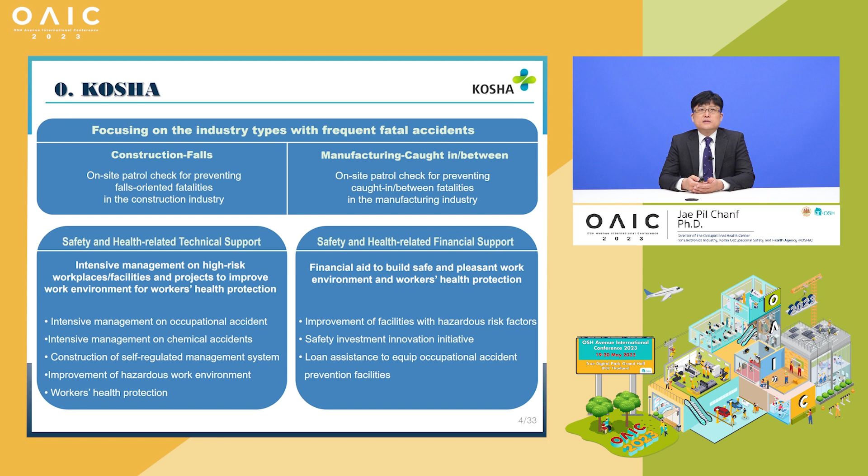Before I move on to the main discussion, I'd like to briefly introduce KOSHA. KOSHA means Korea Occupational Safety and Health Agency. It was established in 1987 and is composed of headquarters, 4 institutes, and several area offices. We especially focus on industry types with frequent fatal accidents, carrying out patrol inspections to prevent falls in construction and caught-in or caught-between injuries at manufacturing sites.

Now, let me begin with the background. The Safety and Health at the Heart of the Future of Work report, published in 2019 by ILO, discusses technology, demographics, sustainable development, and changes in work organization. These changes are seen as the future challenges and opportunities of OSH.

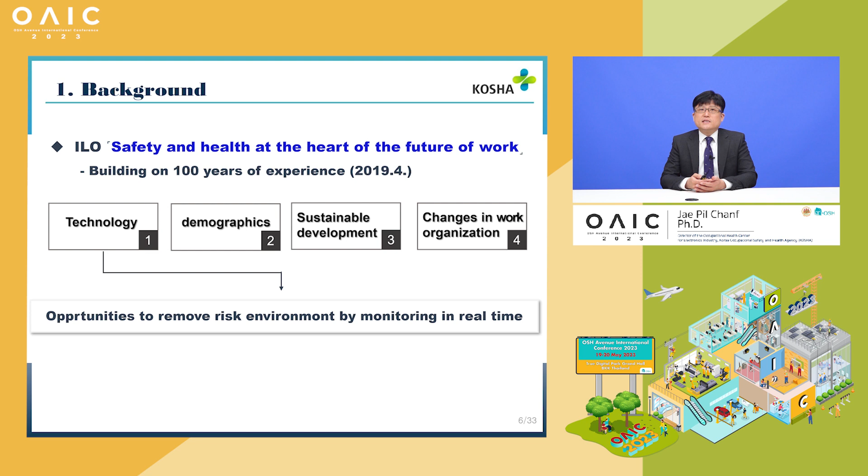The report says digitalization and ICT technology development can provide opportunities to remove risk environments by monitoring exposure to risk in real time. Therefore, a paradigm shift is necessary to protect workers' health by using ICT technology.

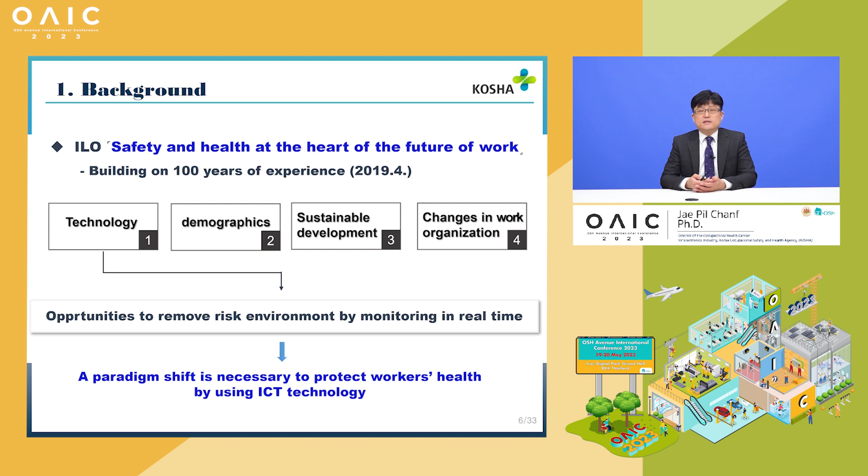Though Industry 4.0 technology keeps developing, it is not being applied to or used in systems for industrial accident prevention in Korea. While these technologies are being actively used in other areas of safety, such as firefighting safety and public security, OSH is applied with just conventional technical guidance and facility and equipment improvement.

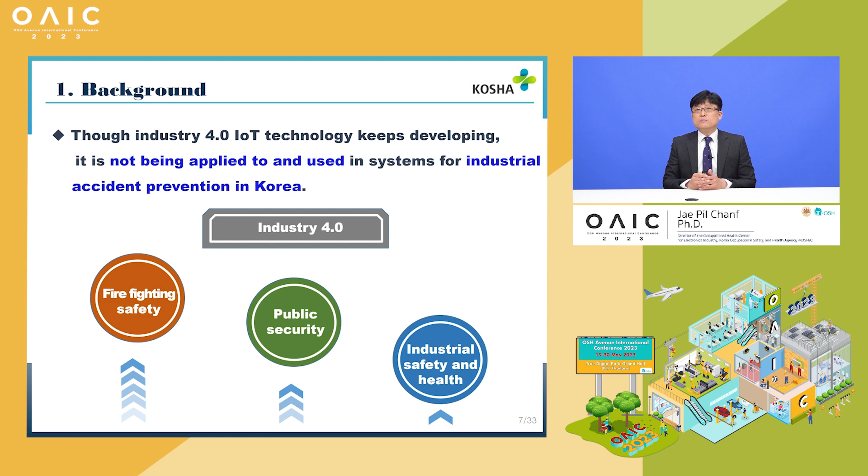As a result, cases of acute chemical poisoning are increasing in Korea. Most cases have occurred during non-routine work, temporary or short-time cleaning work. For example, there was a death caused by acute poisoning with dichloromethane last year, and a person died while cleaning inside a TCE washing tank in 2019.

Although Korea has devised a work environment measurement framework and provided technical guidance to prevent such acute poisoning accidents, these measures are not enough to prevent accidents caused by non-routine work. That is because the work environment is measured semi-annually, and the technical guidance is given just as a one-time visit for technical support. In addition, business owners have a complacent mindset that there is no problem as long as they comply with the basic law, and this results in a lack of motivation to improve the work environment.

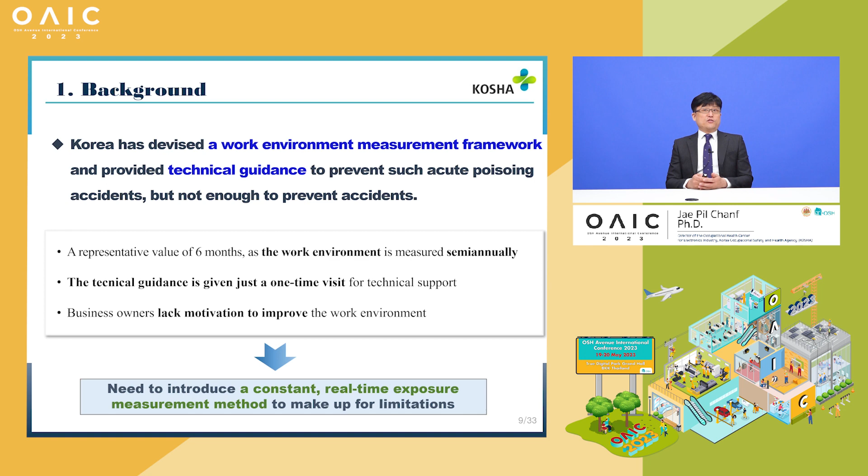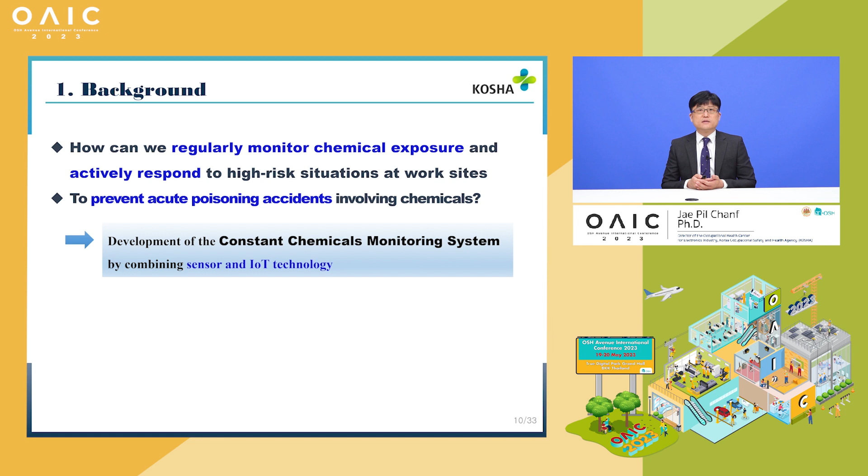So, I need to introduce a constant real-time exposure measurement method to make up for these limitations. How can you regularly monitor chemical exposure and actively respond to high-risk situations at work sites to prevent acute poisoning accidents involving chemicals? To make up for such limitations, we have developed the constant chemicals monitoring system with a combination of sensor and IoT technology.

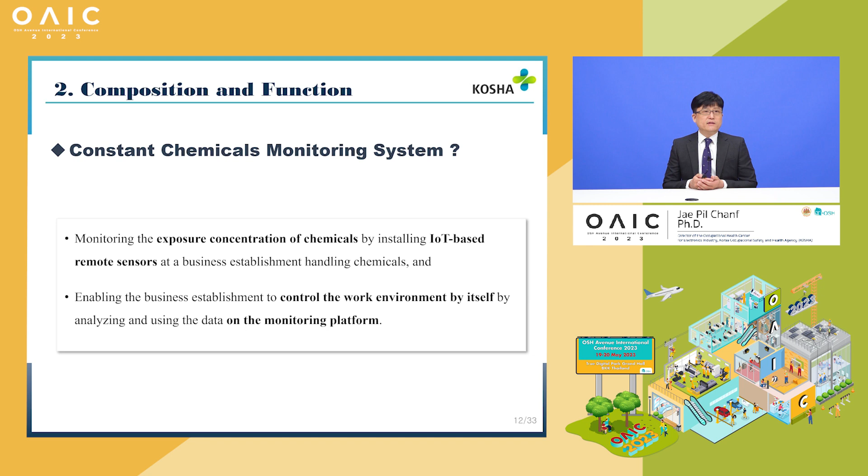The constant chemicals monitoring system is developed to regularly monitor the exposure concentration of chemicals by installing an IoT-based remote sensor at the business establishment that handles chemicals, enabling businesses to control the work environment by themselves by analyzing and using the data on the monitoring platform.

Step 1: With the sensors installed at the business sites, the measured data is transmitted to a monitoring platform where workers or managers can check the exposure concentration of chemicals in real time.

Step 2: When the exposure goes above a certain level, an alarm is triggered in the sensor and an SMS notification is sent to registered mobile phones.

Step 3: With this system, businesses can check the performance of ventilators and improve the work environment to prevent occupational disease. Also, if a business submits an application to KOSHA, we provide support with consulting services and funds for work environment improvement.

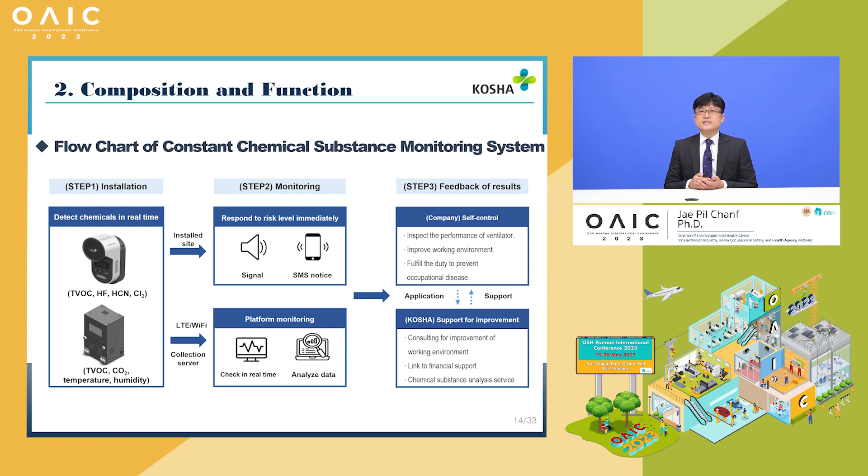The remote sensors were developed in 2020 to measure TVOC, hydrogen fluoride, hydrogen cyanide, and chlorine gas respectively. In other words, you can use a sensor with a TVOC detector if you want to measure TVOC.

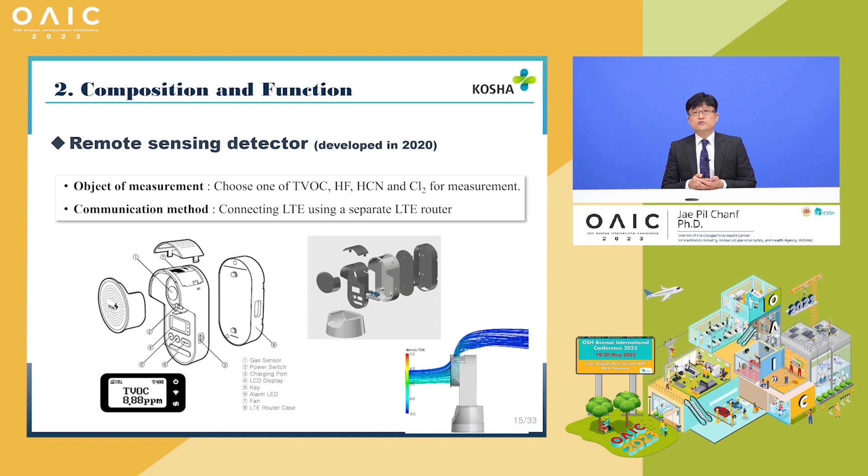A separate LTE router is attached to the sensor for communication. The remote sensor developed in 2021 supplemented what fell short in the 2020 version. The new sensors are modular and can be attached to and detached from the device.

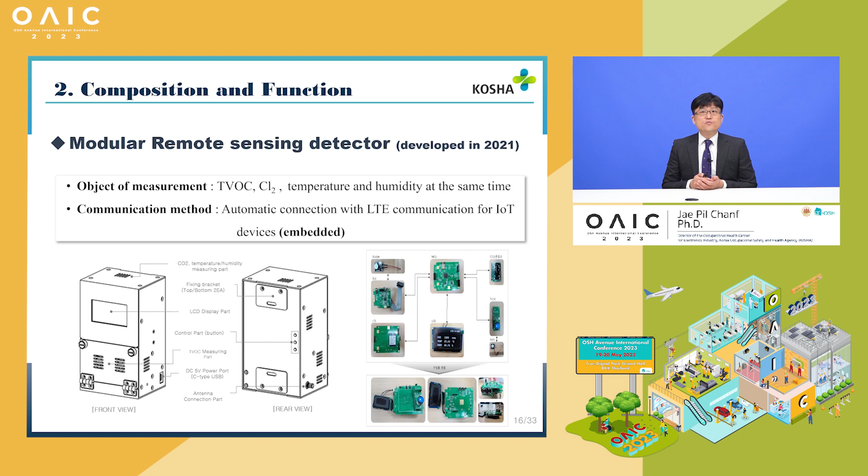This allows TVOC, carbon dioxide, temperature, and humidity to be measured at the same time. Communication parts were also upgraded with an LTE router embedded for automatic connection.

A PID sensor is used for the device as it was the most appropriate for detecting TVOC according to our research. The PID sensor uses the principle that UV rays generated in the UV lamp detect a material with an ionization tendency if it is below a certain electron volt.

Its measuring range is 0 to 6,000 ppm and its response time is 3 seconds. The picture on the left is a PID sensor.

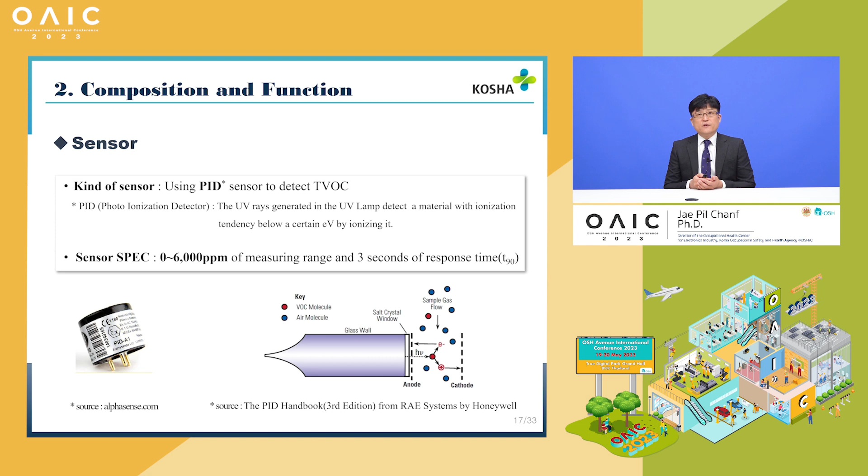The concentration value of certain chemicals can be estimated by multiplying its response factor (RF), provided by the sensor manufacturer, by the TVOC value detected by the PID sensor. For instance, when calculating the exposure concentration of TCE, if the TVOC value detected by the sensor is 10 ppm, it is multiplied by 0.6, the TCE's RF, to estimate the TCE's exposure concentration to be 6 ppm.

Sensor manufacturers provide the RF of each chemical, as seen in the table below. There are about 700 RF values for 10.6 electron volt sensors.

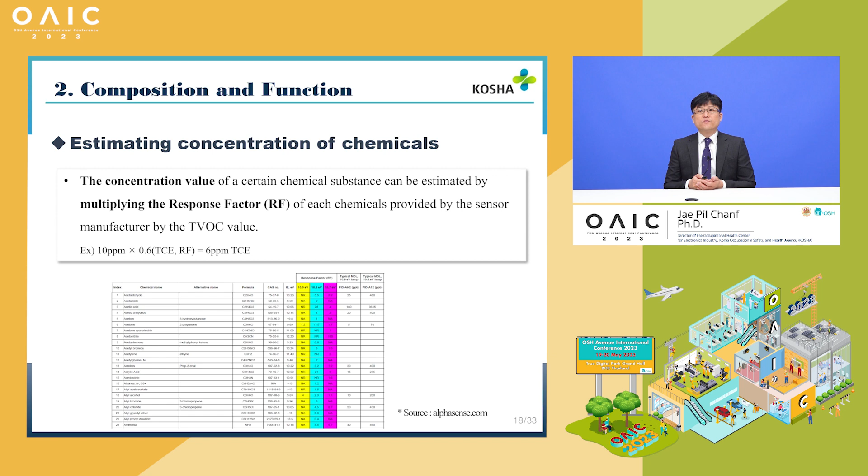The standard for the alerting signal was set on the basis of the ceiling value provided by ACGIH. If a chemical doesn't have a ceiling value, it is set on the basis of 5 times the TWA value. When an alert is triggered, immediate response such as ventilating or wearing PPE can be made on the ground.

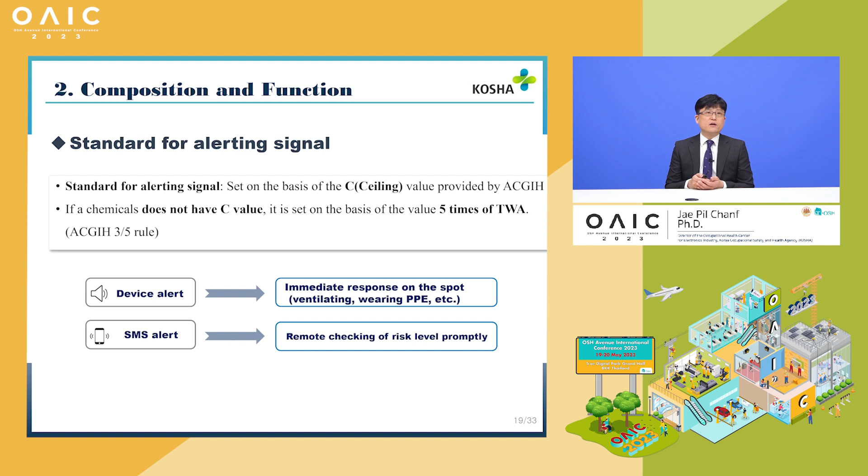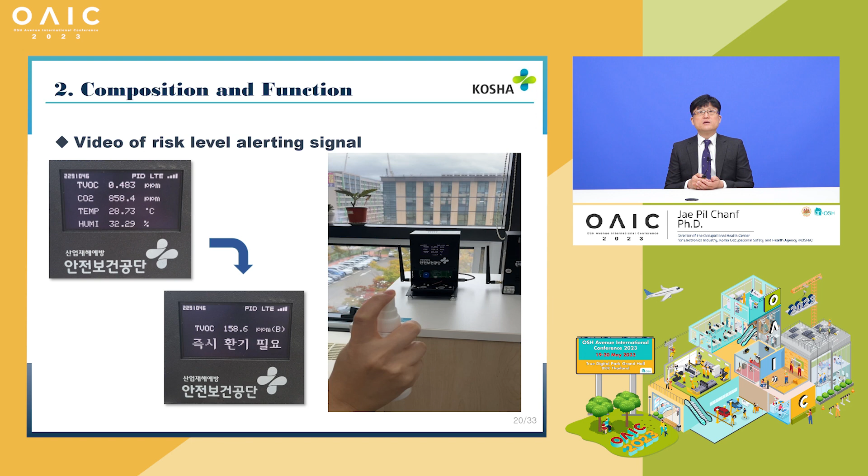Users who receive an SMS notification can promptly check the risk level in a remote environment. This video shows how an alert is triggered when the chemicals in the atmosphere are above a certain level. When the alarm rings, an immediate ventilation necessary message pops up on the LCD screen. Let's watch the video.

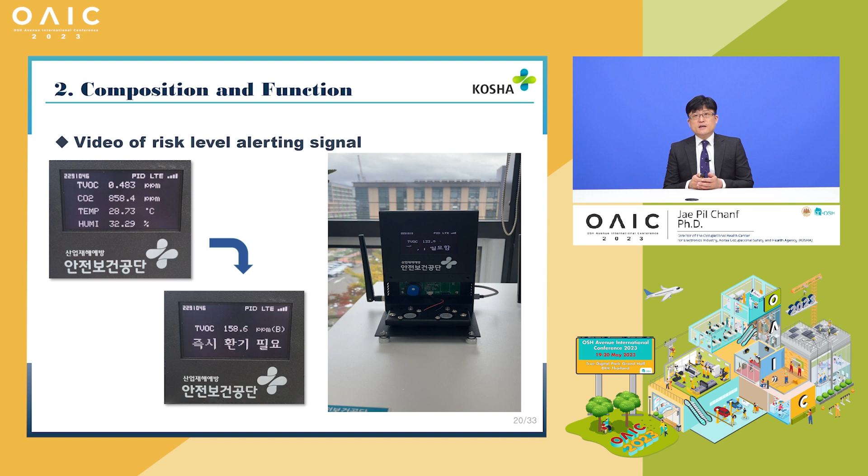For your information, the chemical spray in the video is hand sanitizer.

The exposure concentration of chemicals detected by a remote sensor can be checked on the connected platform. The data can be seen both on a PC and a mobile phone. The data can be used for self-safety management of business establishments.

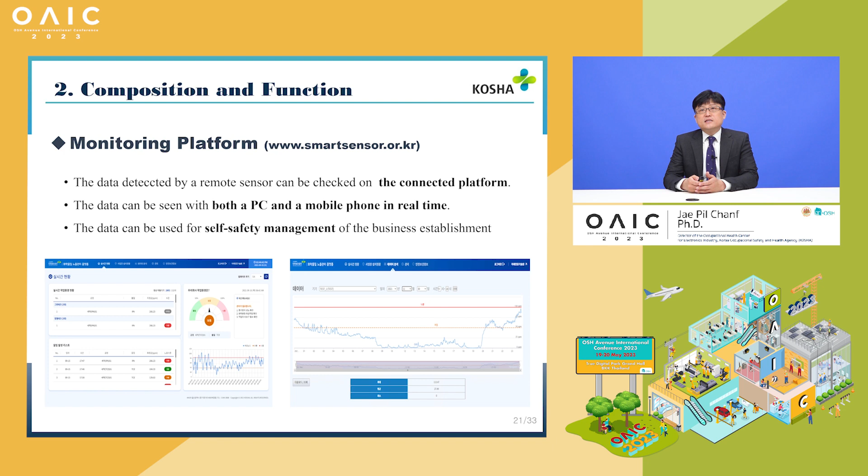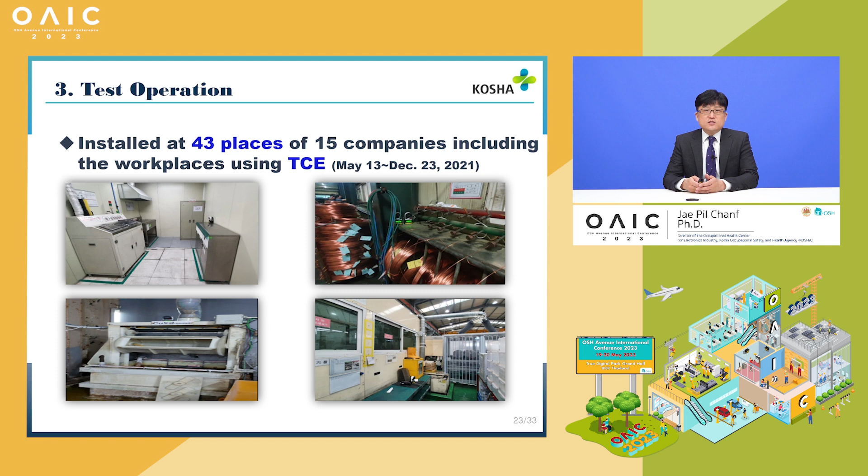Below are screenshots of our platform in operation. Let me share some test operation cases. The constant chemicals monitoring system was installed at business establishments that handle TCE for test operations between May and December 2021.

In establishment A, where a local exhaust ventilation system is normally operating, the daily maximum and average exposure concentrations are below the alert level. If we look at the real-time data over the day with the highest maximum exposure, the value was temporarily high during the time when chemicals were used.

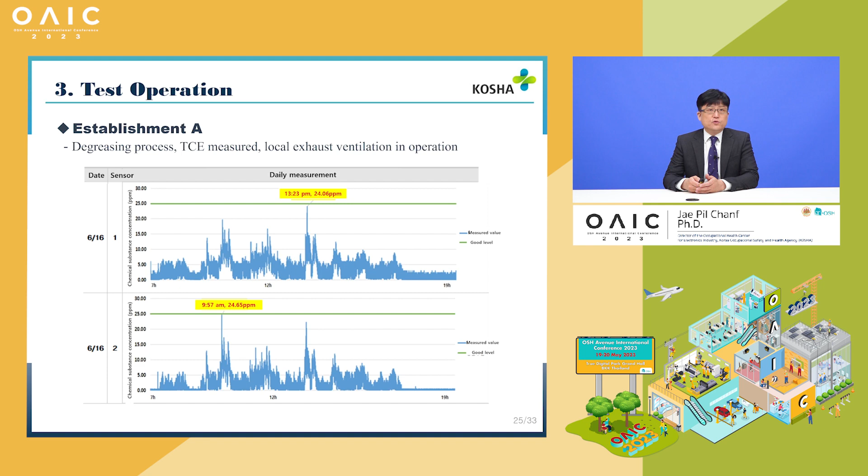In establishment B, where a local exhaust ventilation system is automatically turned on only during working hours, the daily maximum and average exposure concentrations are above the alert level. But it is ironic if we see the data of the day with the highest maximum exposure.

The establishment uses a system where TCE is automatically injected to wash the pipes 24/7. As soon as the ventilation system stops working around 8 p.m., the TCE concentration rapidly increased and was maintained in the washing room. It dramatically dropped when the ventilation fan was turned on around 7 a.m.

Such a trend was recognized throughout the establishment with the installation of sensors. We instructed them to prohibit entrance to the site unless it is ventilated. If necessary, enter the site only after turning on the ventilator from the outside.

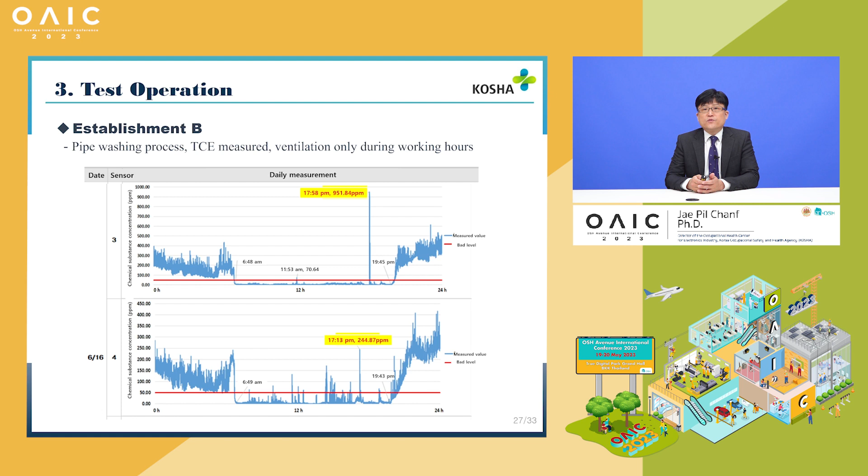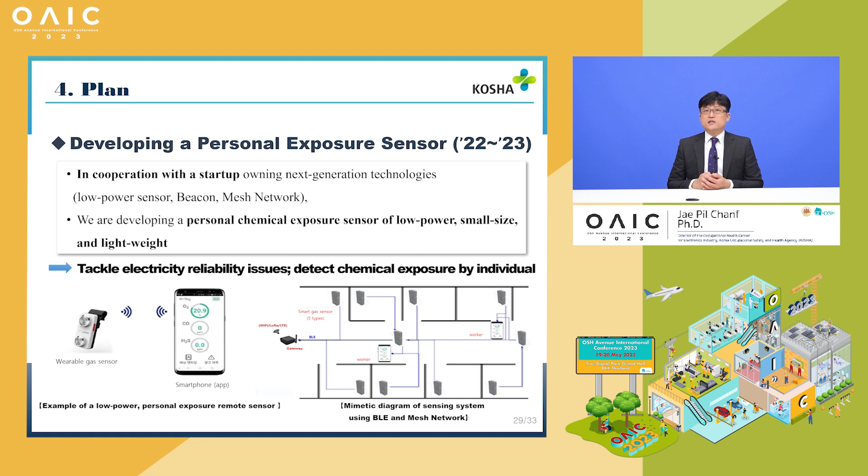Lastly, I would like to talk about the plans and implications of the chemicals monitoring system. We started the development of a low power and small size personal exposure sensor in cooperation with a startup. If successful, the sensor will run wirelessly for more than a year, have no restriction for installation, and enable the detection of exposure concentration of chemicals for each individual.

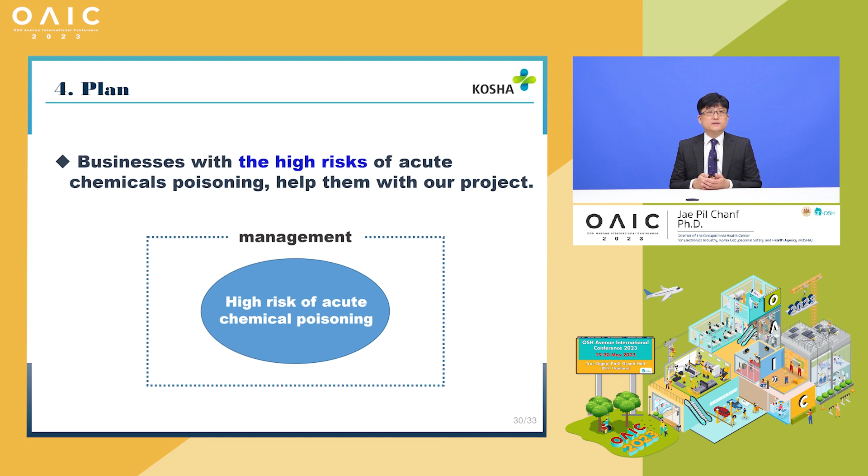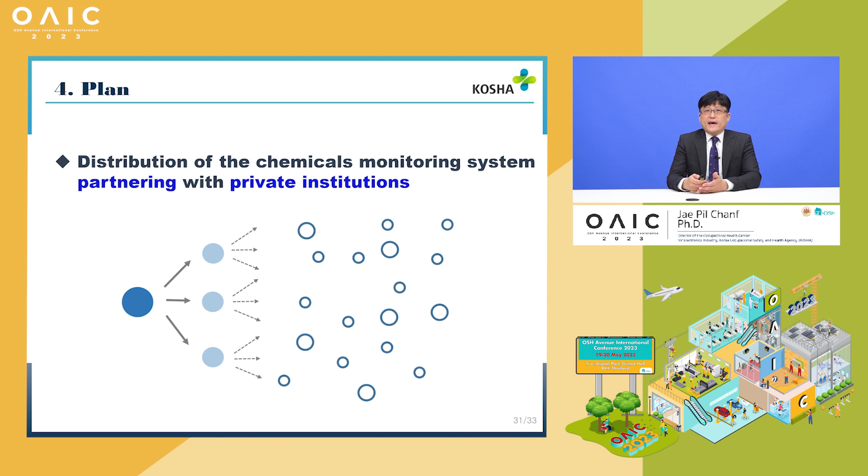For businesses with high risk of acute chemical poisoning, such as those using cleaning chemicals, we will help them in connection with our project. Furthermore, we will partner with private institutions to distribute the constant chemicals monitoring system to small and medium-sized businesses. In the mid and long term, we will stabilize the system by 2027 and institutionalize it by 2030 to encourage its distribution among business establishments.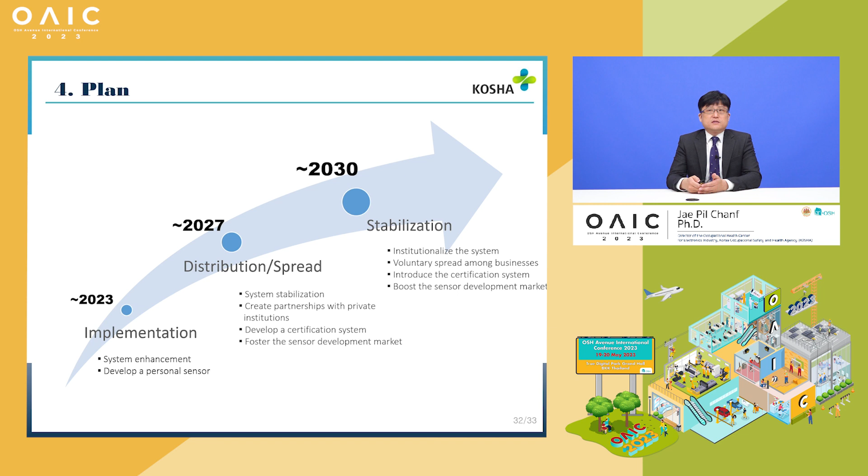I believe the constant chemicals monitoring system will be an opportunity to shift the paradigm of exposure measurement for occupational health. According to the law,

Work environment measurement is conducted twice a year, and this measurement estimates the exposure by the value detected on the day of measurement. In contrast, our monitoring system always monitors chemical exposure, which makes the system more meaningful.

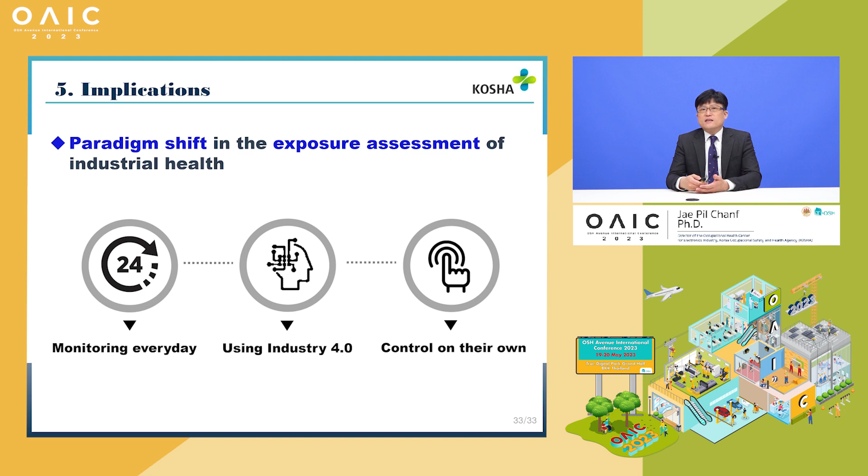Moreover, it presents a new direction for chemicals management, where the exposure level is monitored remotely and regularly using Industry 4.0 technologies such as sensors and IoT. This will allow businesses to establish a system that can control the exposure concentration of chemicals on their own.